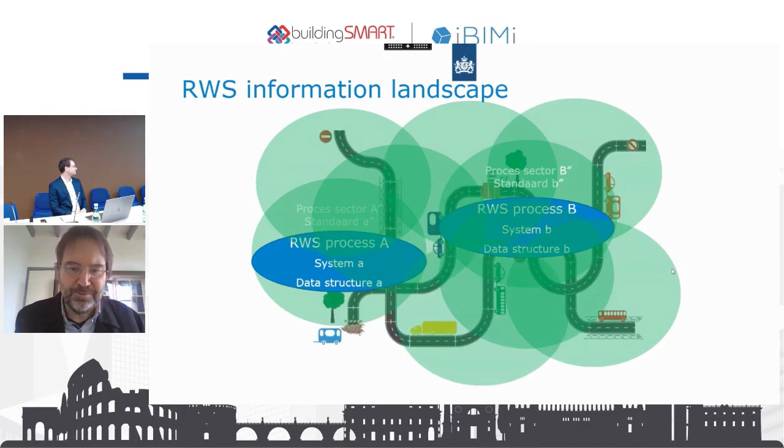We've done that with all our different processes. And because there are many processes running at the same time for many sorts of infrastructure, we end up dealing with a lot of different data structures, because we never developed our data from a data perspective. That's why people can look at the same thing and see different things in practice, even though the actual reality is the same. And this is not easily changed, because all these procedures and standards, they exist.

Now at Rijkswaterstaat, we have to deal with all these standards. And the challenge is, how do you do that? As Rijkswaterstaat, we have our information landscape, and that already contains many different systems with many different semantics. And we have to deal with the product landscape.

The product landscape increasingly relies on BIM models. So we have to be able to deal with BIM models, and usually these BIM models are made based on a data architecture which comes from the contractor. But we also have to deal with all sorts of open data that are available from a national perspective and so on, like underground data and data from other asset managers. So the question is, how do you do that?

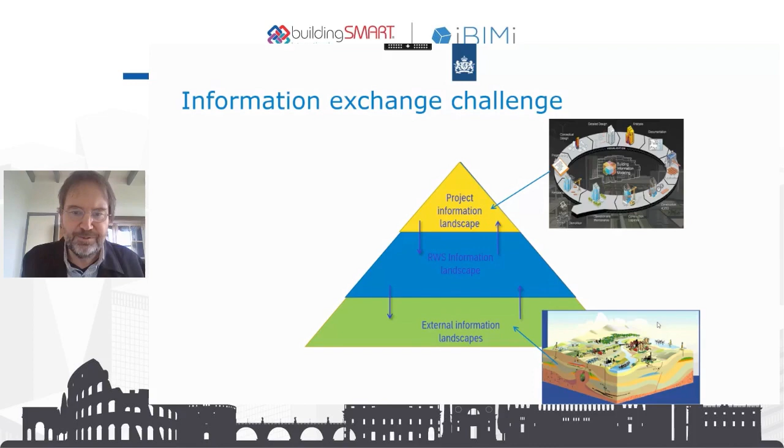The old-fashioned way is with our own system. First we try to make a big new system, of course, and we spend a lot of money, and then we say, okay, we cannot deal with this, so we have to learn to deal with a distributed world. And I want to share some of our findings, and also the relation with the BIM models.

First thing is dealing with semantics. We have a Dutch Rijkswaterstaat development of our own object type library. In our object type library, each concept has a definition. And we also made a mapping with the Dutch CBNL, which is the semantics that we agree to in the Netherlands.

Actually, it's going to be rebuilt because there are still lots of problems with it. And there's also a Dutch initiative, the CBNL. It has the same idea: we have all these dialects, and we want to connect them.

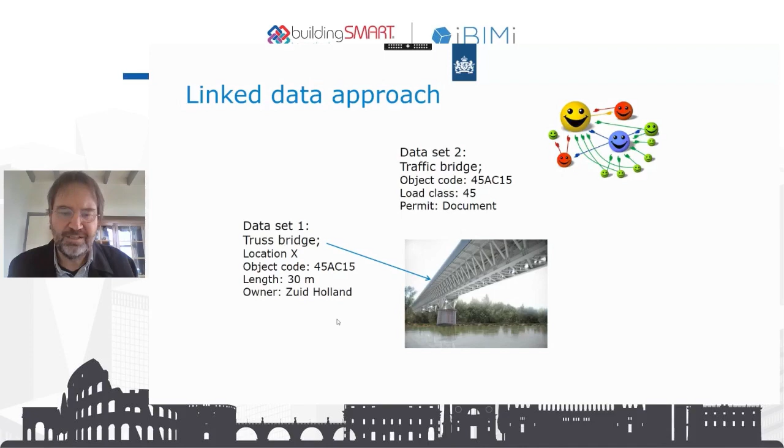And someone else says, I have a traffic bridge with the same object code, and it has a load class and a permit. Based on semantics, we can say a truss bridge and a traffic bridge are both subtypes of bridge. It has the same object code, so probably this bridge is the same one as that bridge.

And the third asset system may say no, it's a steel bridge on location X, and it also has the same subtype relation and the same location, so you may conclude this could be the same bridge. This one says it has a year of construction, 1900, and there's a document connected to it, maybe an owner, a person within the same region, so there's a relation because it's both owner. This way, using linked data, you could relate things without actually combining them.

And if you connect all these things to geospatial glue, then you can still find all this data from one point. So this is the thing we're looking at at Rijkswaterstaat. We haven't fully implemented everything, but there are more than 36 pilots running at Rijkswaterstaat with all different sorts of digital twin use, because each process sees a use for digital twins, and now we're looking at the way to integrate all these different initiatives.

So we want to use semantics because semantics gives the meaning, and we want to use location to connect all these data sets. Maybe if some new BIM model comes in, we want to be able to connect it, and connect it to external data, maybe scanning data or photography data, and find the human interface which makes it easy for us to find the data we're looking for, or to manipulate it the right way.

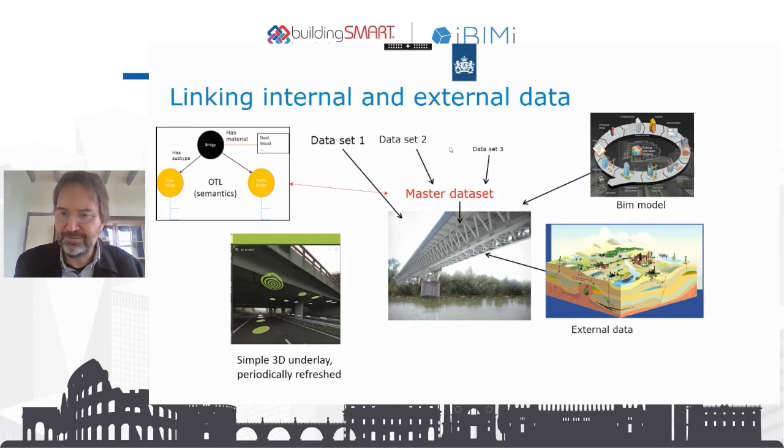And we don't do that starting with a BIM model, because we have a network which is 100% of our network, and we adjust maybe 1 or 1.5% per year. So you cannot say I have this BIM model and this is my model for life, because this BIM model has to feed into our existing asset management, because even if we have different projects, each contractor will give us a different BIM model, so none of it fits into our way of asset thinking.

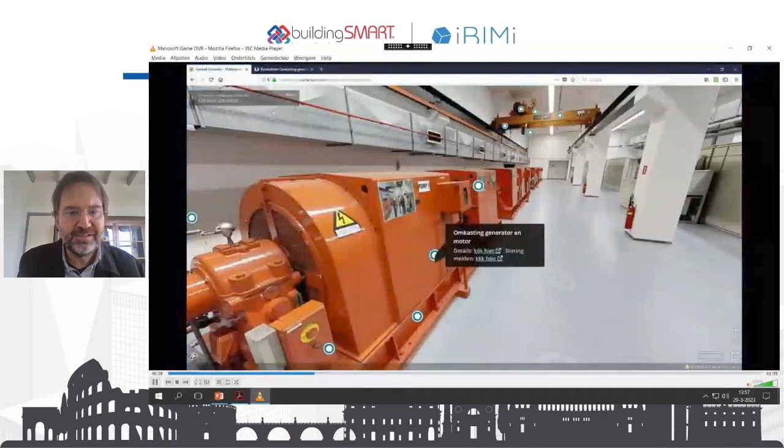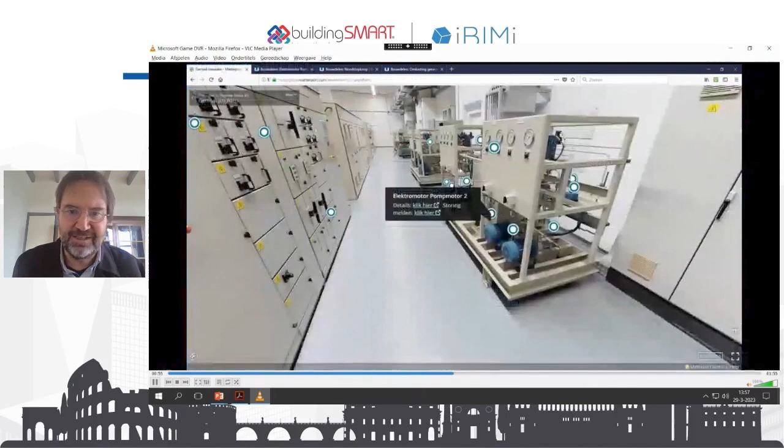The idea is that the one doing the maintenance goes directly to the right field in Ultimo to make a registration. This way, he makes sure he doesn't register it on the wrong machine, because he just goes to it. The other way is that he could also find other data related to this point. So it isn't a real BIM model, but it's good enough for asset management to go to the right spot and find other connected data related to it. This is a really practical way to deal with the problems we find in asset management.

I will now give you another example. This is about the Dutch dikes. We have dikes, and the underground is sometimes soft soil, and there may be some risks of dike failure at high waters. So they model the underground, and you want to do it in an interactive way.

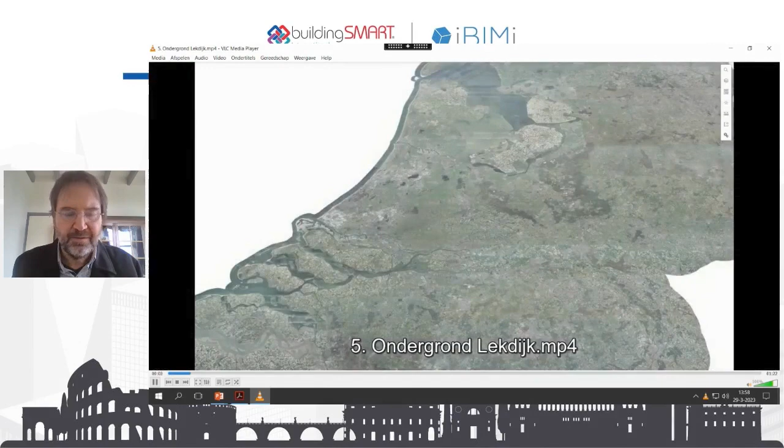This is also an open source viewer, Cesium. Here there are some maps showing certain types of details, and this can be placed on the underground. Here are all the measurements of soil composition, and based on that they made 3D layers. They made an interface showing how the underground looks based on the grid you put on top, or you could focus on one point.

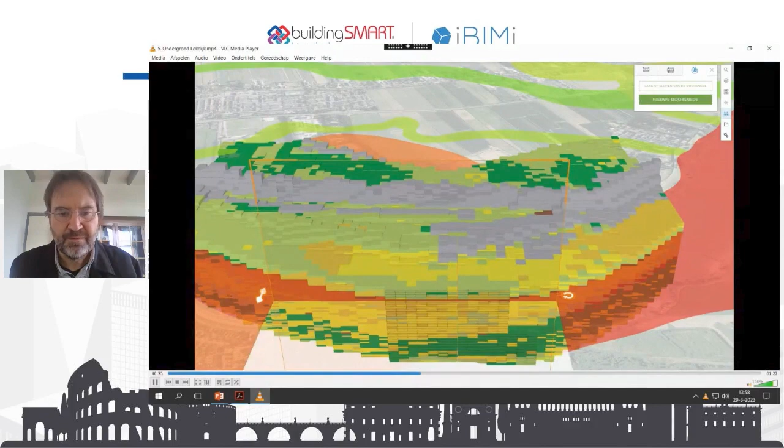And then you make an intersection and you can look how is the underground below this piece, the dike. The actual data used here is not owned by Rijkswaterstaat. It's open data, but we use linked data technology to connect all this data to a viewer where you can view it for the application we want to make.

Now there's a third one I want to show you, a digital twin pilot we did, where the idea is that if we have a shared environment, where in the past we used GIS, a flat 2D GIS, maybe we could have something where we could put all sorts of data on top to manage it in a more integral way.

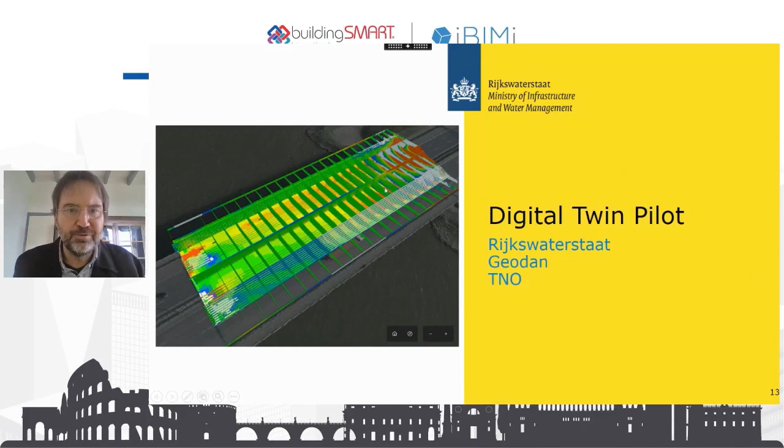Now I'm going to go to this viewer and show you some things. Our basic map is just a layer, a basic map. We could also have a picture made from the air, and we also have an open data source for all the buildings in the Netherlands. We can switch it on or off, so we put that on top.

It's not Rijkswaterstaat data, but it's open source available data. This sort of data has the energy label or year of construction. So this is all open data, and it's also an open source viewer. We could already have this data without doing anything ourselves.

There's also a tree library, and all the trees are in an open source data library, so we could also add them to our background. Then we have our own digital topographic data set, and it's 2.5D. Maybe I can show you about that.

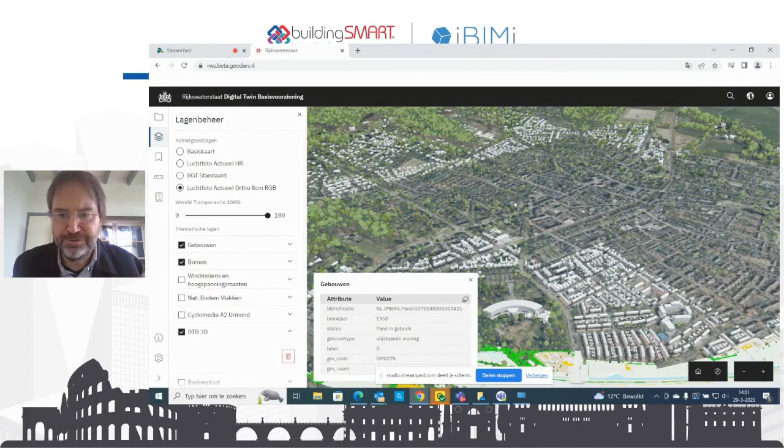Wait, I'll do it differently. I will go to the user stories now. You have some idea of the basic maps, and we made some user stories to show you what we can do with this. The user stories also have a description. It's all open available. So this is our basic map.

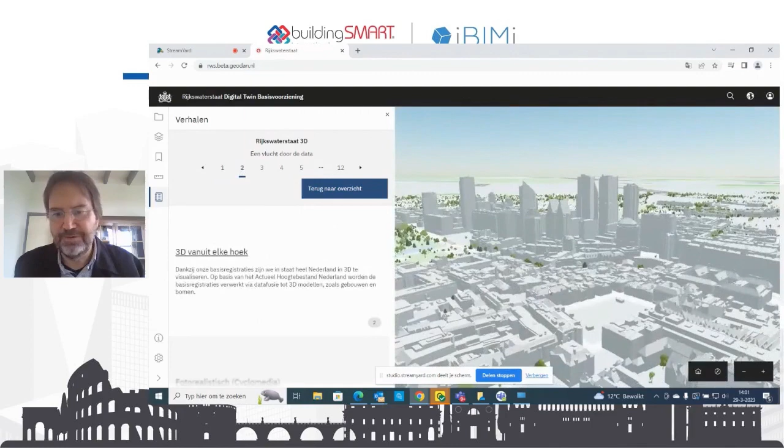This is Den Haag, for instance, but we have it for all of the Netherlands. We have data on all these buildings, available as open source, and we can put this in our open source software, so we could share it with each contractor without having problems with rights of access to this software.

We can add photogrammetry with it. This is an orthographic picture combined with laser scan view, giving a real 3D result. It's really 3D because you can access it from any direction. So this is all still using open data.

Then we add our digital topographic layer, so this is 2.5D. This is a traffic point where all these bridges are crossing each other, and they're only 2D at a certain height. But we have this for our whole network, so we also have it from our sluices and from our bridges.

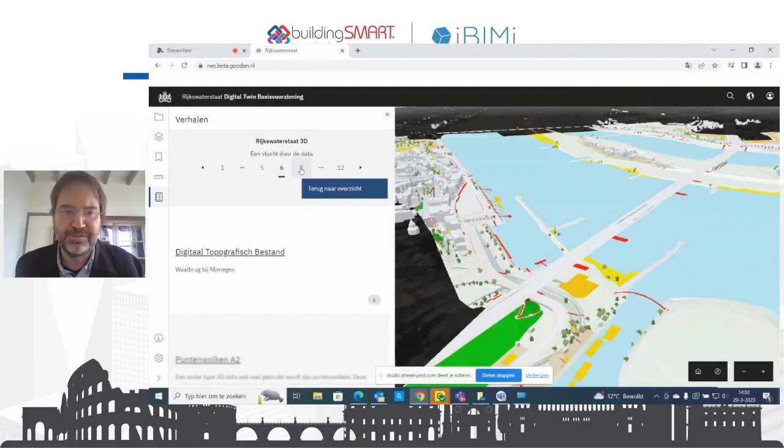If you have this basic layer, you can add all sorts of other data to it for specific uses. Here we have an example where we've added point clouds, which can be used to check our digital topographical layer, if it's correct. Here we see our digital representation, right on top of the actual real point cloud, so we can check if it's correct.

Another application is that we had a BIM model of the Heinenoord tunnel, a tunnel in the Netherlands. It built up a little bit slowly, but they didn't have a 3D model, and they wanted to put the maintenance on the market for a longer period of time. So they scanned it first, making a complete scan of the whole tunnel, and added all their existing documents to this.

First they made the scan, then they extracted 3D objects from the scan, making a BIM model from the scanning, and then connected all sorts of data to this BIM model. Now you can navigate it, click on one, and it gives you the data on this signal device, as we call it in Dutch. All sorts of data, sometimes drawings, sometimes installation schedules, and so on, were connected to this interface to communicate with the contractor.

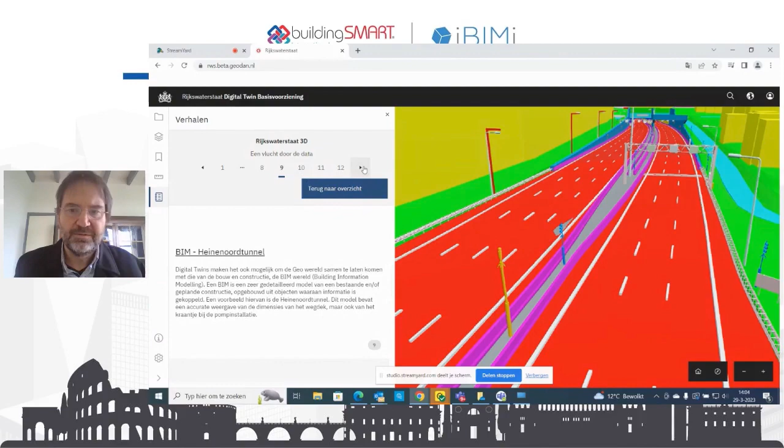Also inside, you can see the installation rooms, where this part was actually really modeled in a BIM model, because it was an adjustment they wanted to make. So you can add that to the surrounding you already have.

We also had a renovation of a bridge. I don't have my DTB below it, so it's now only a picture of the underground. It's not properly on the existing underground, but I could add an extra layer, and then it would work. So now it stands on top of the road. Of course, that's not correct, because one of the layers is switched off. But you do get the idea.

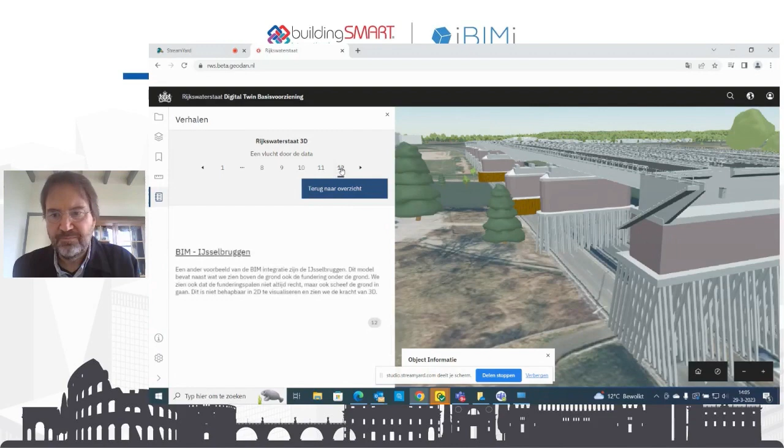And then also the part underground. So the last one I wanted to show you, the last story. Oh, that's a shame. I think it gets a little bit overheated. I will just show you the picture instead, since I can show it in my presentation.

The idea would be that there's a time slider showing where we expect the first cracks will occur. So this is a way where you have a complex model behind it, but the result is something simple you show in 3D. I could have shown you live, but it wouldn't work.

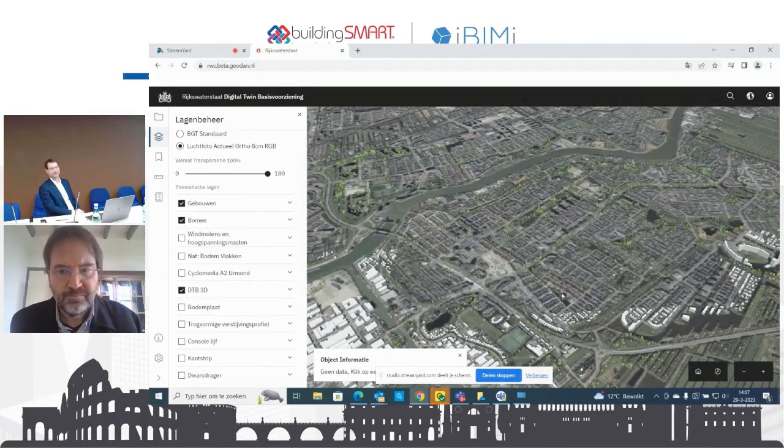So there's the buildings. Oh, here it is. So this is our DTB layer, our own data layer, where all our 3D data comes from our own management system. It builds up a little bit slowly now - I think I moved a bit too quickly, but I think you get the idea of what we are trying to show you.

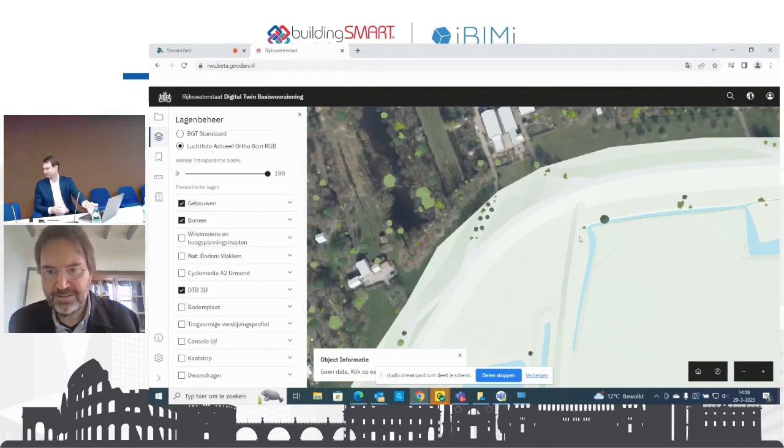I can also go to my own house, then you will see. It's a different one, it doesn't matter. You can go to any place and just see this is our DTB, and from our dikes. And here's the house which I aimed for.

So this is how nicely you can combine your own data with open source data from others and from government, and then make something which helps you in practice. I wanted to show you this because I think it helps the discussion about BIM and how BIM fits into asset management. And that's about the end of my presentation. Just in time, I think.

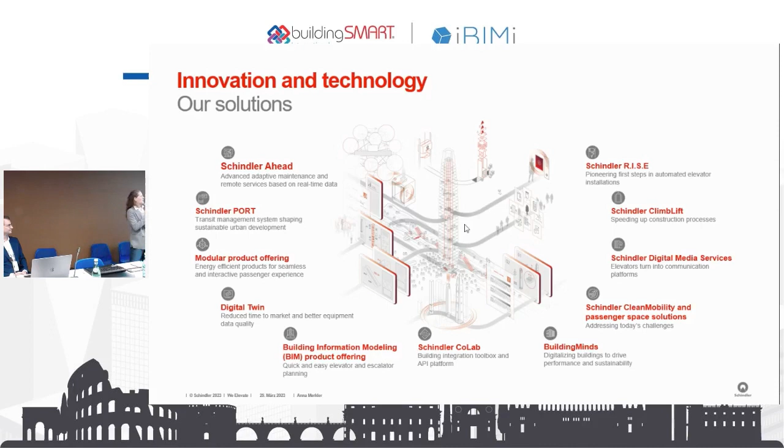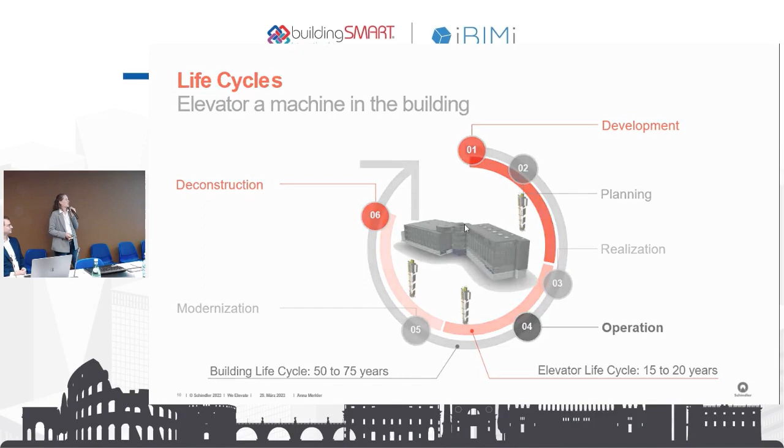When we talk about an elevator, it has a shorter life cycle, around 15 to 20 years. When we look at the life cycle topics, we have different life cycles inside one life cycle per building. Then, of course, in the Schindler process, it's not just the life cycle - we have new installation, then going into the operation or the service, existing installation, repairs, and afterwards modernization.

I worked a lot in modernization, doing research on how the building is looking in its current stage, and if the new traction machine will fit into the machine room or not. So modernization is also a big topic, and then, of course, we're doing existing installation again. In this process on Schindler's side, we have a lot of people involved - project techniques, installation, and of course the service side and the modernization side.

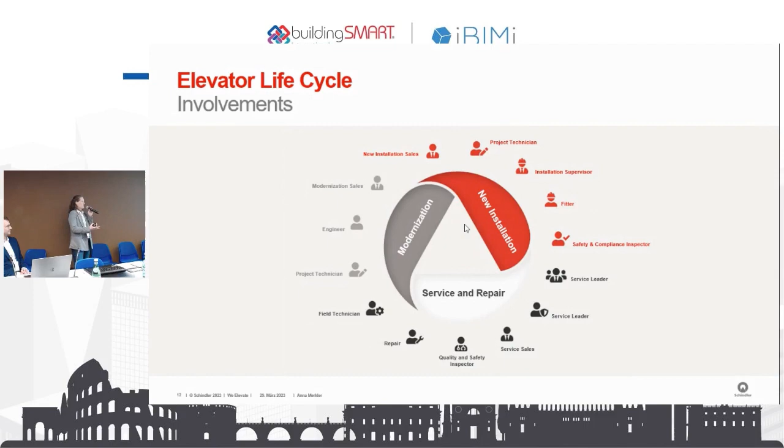That means we have, inside this life cycle of one building, a lot of challenges with interfaces - not just externally with our stakeholders, but also internally, in how we manage this whole data flow through the whole life cycle. And we've seen how different the market is - when we talk about buildings it's quite different than when we talk about airports, ships, or a hospital.

We have different requirements if we talk about different phases of the life cycle, and internally, different interfaces, different software and so on. So what are we doing to solve these challenges? I think we try to build a consistent data model from start to end, and it goes further and further.

Of course, that's quite complex and not easy to solve. We say start small, and we start with the planning phase, one step behind the other. Where we started, we came from the 2D world, drawing with ink on paper, and afterwards we moved to a CAD tool, still 2D, but now on a computer.

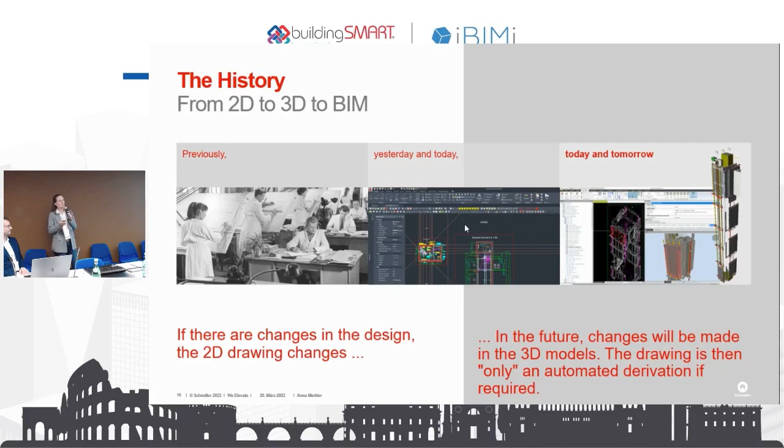What questions do we have to clarify for that? Within buildingSMART these questions were really common: who is involved? What do we need as input? What do we give as output? When do we need it? How do we need it? And why?

So we're able to define our requirements already in a quite early phase, for example for traffic analyses in a building. We've seen traffic is quite a topic on the streets, but it's also a topic inside buildings. When we get this data early from the customer or the building models, we're able to make specific traffic analyses, model-based, with already existing data. We don't need more than there is already.

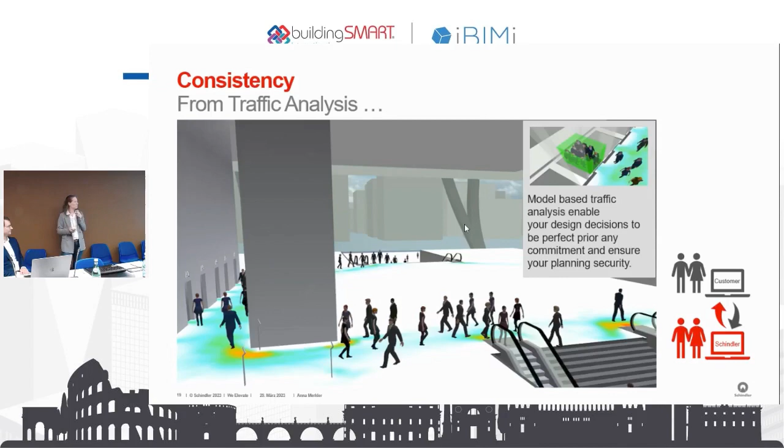What we then provide in an early step is a plan and design tool. It's web-based, and you need to insert around five values and you'll get a model back. Of course you also get a drawing and a product sheet PDF, but you already get a model in this early stage. We take a lot of assumptions in the background, predefined settings we've done, but it's already possible with five values to generate a BIM model you can use for your planning phase.

Here is what we do later when it moves in the direction of an offer. We get the model from the architect, and we've defined within the VDI that as a requirement, the request should be inserted in the model from the architect. So you already have an IFC transport element which carries all the requirements needed for us to define the elevator.

It's a little bit small, but everything is there. From our perspective we have quite good input, and it's already machine readable, so we can use it for generation.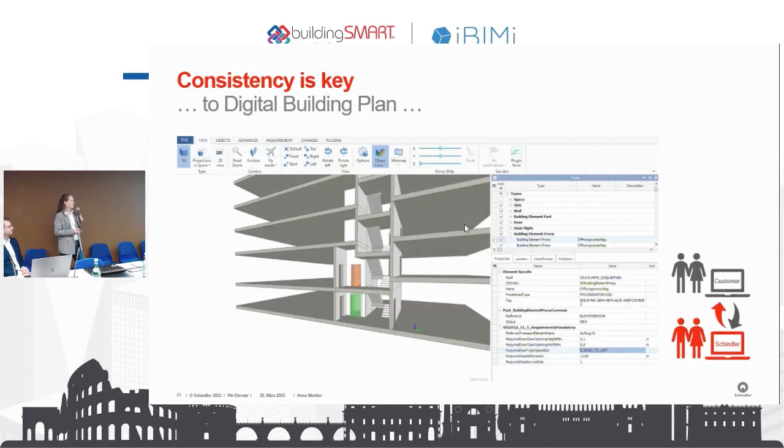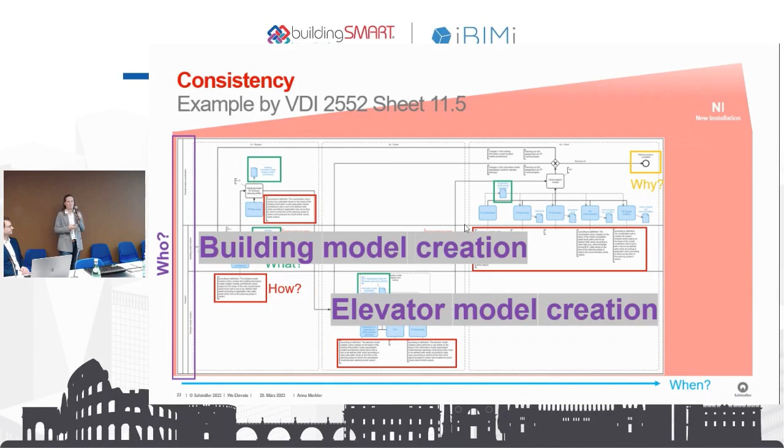So we have the building model creation, and what we do next is create the elevator model. With this data we got, here you see it now in a manual way, but that's done automatically. You get the input - for example, you see my first presetting about the doors was wrong, so I'll change the doors to fit the requirements from the customer.

What we are doing later - we now have the elevator model in an LOD 200 maybe, and you see we have the geometry, and also the openings are defined as openings so the architect can use them in his software again for his cutting and penetration planning - I don't know the English word, but for all the cuttings.

He also gets, for example, I think you've seen it in the beginning, this provision for void. So he already knows how much space he has to reserve for the elevator inside his building.

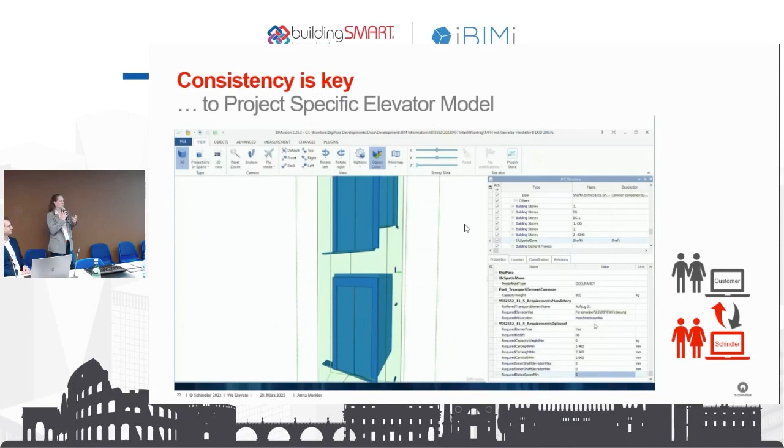And we matched it with phase A, where you get just the space you need, in LOD 200. Phase B, when you get a little bit more detailed, then you have maybe also the doors inside, and also some other cuttings you need. And in phase C, you have an LOD 300 where every component relevant for the life cycle, service and operation is pictured as 3D geometry, and of course carries also the necessary information.

So what have we done? We have seen a lot of challenges with the different customers and stakeholders. So we try to give quite easy access to this information, web-based, and this is not some data which is like in a library. It's really connected to our configurator, where you have all the time the up-to-date planning data.

We try to really make an early entry, as early as possible, because we figured out that there is a lot of information quite early available. So we don't wait, we want to do front loading. We all want to improve and get more efficient, and I think that's quite possible when we talk about elevators.

And of course, we don't talk about all of our information. We have a lot of information from the elevator, and I think we can crash all your products and softwares with our data. So we try to give a minimum output or input. And then, yeah, maybe there are 5 project-related specific elevator properties we need, but that's then not a problem.

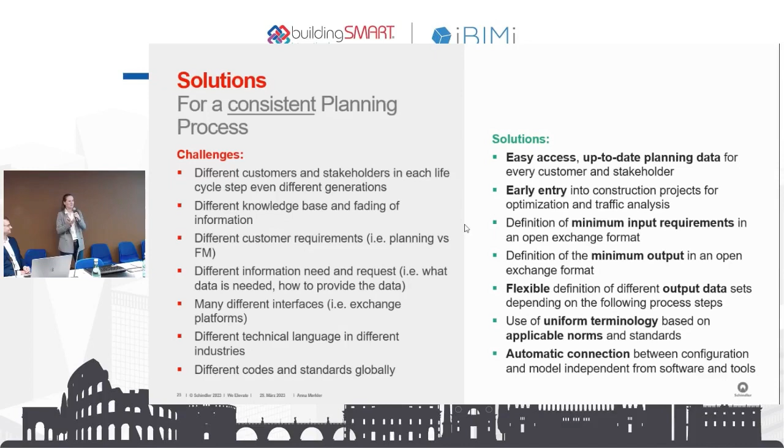And of course, we try also to automate these connections. I think we are not quite there yet, but we talk also about trying IFC JSON via APIs, so that you can then also do this exchange of information, input and output, what you have seen with the planning tool, in a quicker way - maybe not this manual typing from a printed sheet.

And then, of course, when we have this data, we can, for example, feed our robots for installation. I mean, they will never ask for a plan, they use the data out of the model, and then it's machine learning, and it works. And of course, that's our think small, start small, and we want to think big.

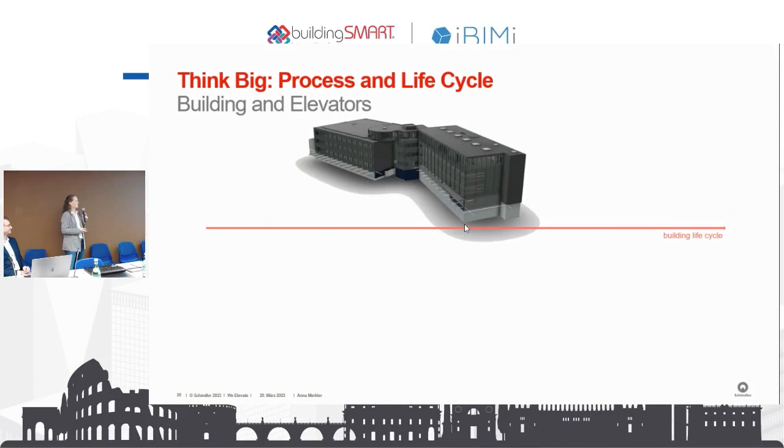Of course, we have not just the life cycle and a new installation in mind, we have the whole building life cycle in mind, and we start there with the traffic analysis, the planning and the fulfillment progress. And of course we then want to talk about the existing installation, about exchanging information in the operation. Therefore, we have a solution called CoLAB, which is then able to exchange data from the operating elevator with the building management system.

And of course, we want to get some information back for modernization. How does the building change in the life cycle? Are there any adaptations at the mechanical, at the doors, or maybe at the machine room? And then, we talk about the steps in each phase of the life cycle, at each phase of our process.

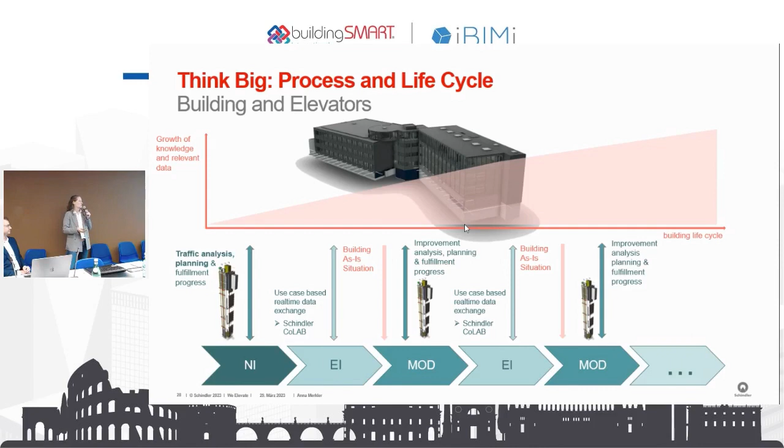So what have we done with this start small? We have project-specific data which can be exchanged. I think with the VDI, we already have a standard there which describes it for the planning phase of elevators. And where we want to go, we want to have automation and become more efficient in our planning, in our operation. And for that, I think we need a little bit more standards than just for the planning phase. And we need to set the standard.

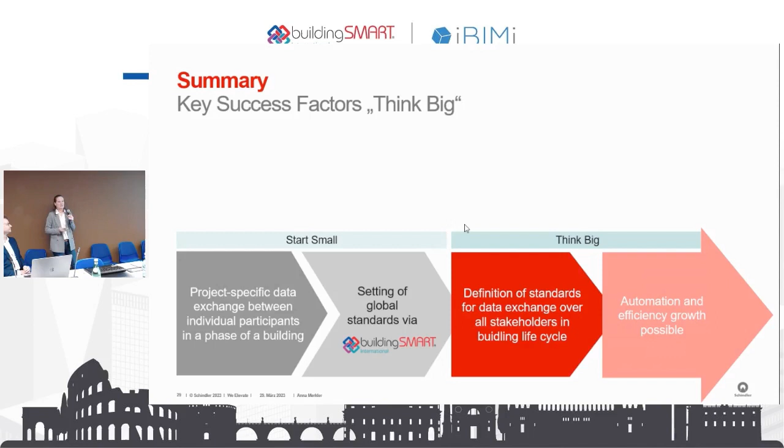In my point of view, we are buildingSMART, we are the IFC and CEN. And so therefore, we asked that this VDI is becoming, or going in the direction of, CEN.

We had there an exchange already with Rasso Steinmann, and we will also have an exchange with buildingSMART data dictionary, so we are going there some steps. The next step, to make it specific, would be to develop guidelines for construction and operation of an elevator, to do this definition also for escalators and moving walks, and of course to test this all in real projects. That's an invitation to contact us, Schindler or the buildingSMART product room, so we can go these next steps together. And of course, we are quite open to test the VDI standard we created already with software.

We tested it in real projects. We're using it already in real projects, quite good. And so I hope we can make it a little bit more specific and go in small steps ahead. For example, that every project in the future will have also an elevator model inside.

In the meantime, it seems that every stakeholder has a completely different approach, different things to solve. So there's another one. So... Wow, I don't know if it disappeared.

Okay, good afternoon everyone. I will try to give you our perspective as a manufacturer of the product, which is part of the build-ups or system, which will be totally probably different from my colleague. I don't know if it will be less complicated, much more complicated, but it will be different for sure.

So I chose a few topics which I think will give you some context why for us it's important to work in BIM. This is also my personal questioning: what should be a roadmap for the manufacturer in the context of BIM, how we as a community of buildingSMART International can provide some answers to make this transformation maybe much easier for companies like mine.

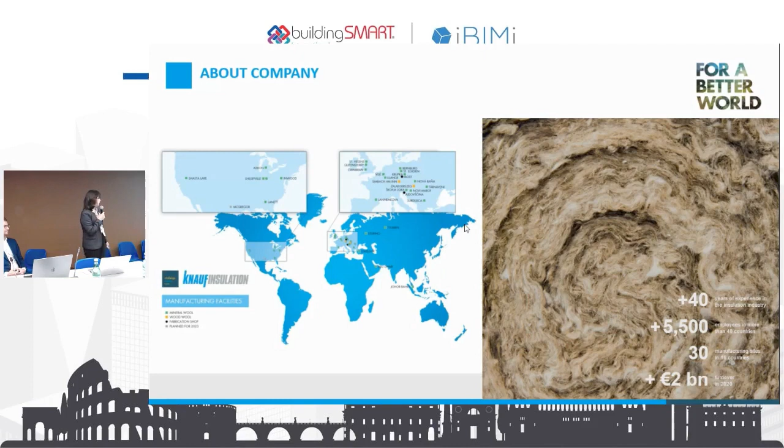Myself, Magda Pyszkowski, I'm a civil engineer. I did my studies in Poland, and I was working for many years for a construction company based in France - a big construction company. Then I moved to manufacturing 4 years ago.

I was happy to participate in the first meeting of the digital supply chain when we signed the memorandum of understanding with buildingSMART International. That was really a good experience. I'm also part of EURIMA.

EURIMA is the association for insulation manufacturers, and I had the pleasure with my colleagues to write a book about 5 years ago now, about data in the BIM environment.

Who is the owner? I think this is really an important question, as we discuss in each presentation, who owns the data. So we already try to understand this over time.

For the manufacturer, as us, as an insulation material producer, sustainability is really a key strategic focus today for everyone producing something used in buildings. This was always our driver as a company, but now I think it takes on much more importance because of circularity as well.

When we talk to architects, or read about architects, we need to take into consideration CO2 emissions. I think this is something driving us, and we consider this must be part of the design - this must be part of the BIM approach.

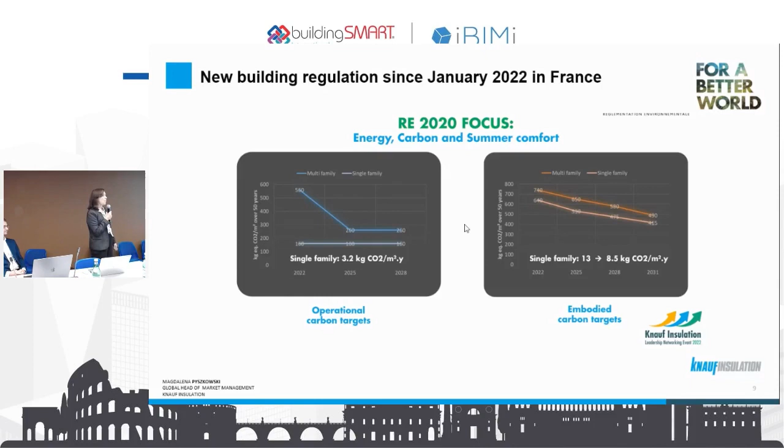What's the impact? It's in fact impacting all of the materials. So when we talk about insulation, insulation in the building element provides 3 to 8% of total embodied carbon. This kind of information is part of the build-up design, and we need to take this into consideration in the BIM design. So somehow this data must be reachable via BIM models.

I think this context is really important because it also gives you the connection between the data, or which kind of data you need, as a request for the data from the manufacturer. We are also trying to understand the landscape of BIM, building information modeling, depending on the countries, what is needed where, and we see that by country, the interest of BIM is different.

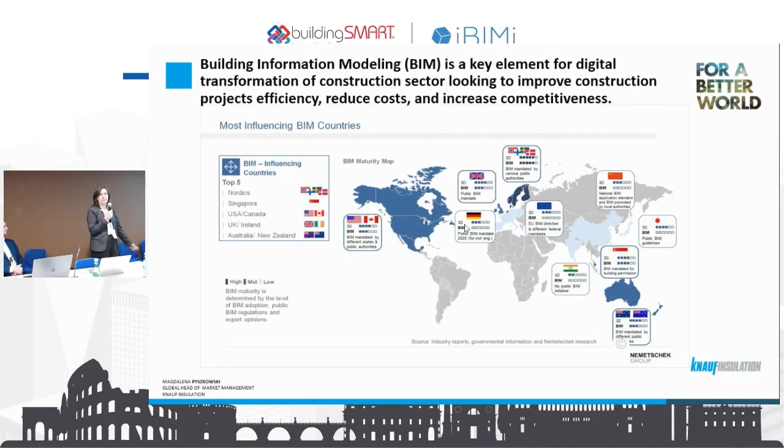So depending where you are producing, where you are selling, who is asking for what, it makes our job, working in the central part, quite difficult because you cannot just provide one standard for the company. You need to really deal with the different kinds of internal requirements.

What we see also in our world, specification, tender, quote, purchase, fulfillment, where we are as stakeholders, is that we are really switching from the analog to the digital world. These operations are demanded today to be done digitally, much more strongly than a few years ago. Now we have some kind of request already.

So, okay, we said sales growth maybe, because we can increase the company credibility. Maybe we can increase the product value if we provide the right information. We can maybe transform our transactions into partnerships. And for sure we can have direct contact and early presence if somebody asks, right?

So for us, in terms of cost reduction, I didn't find too much. Maybe we can increase the retention and loyalty of our customers, and maybe reduce cost per lead. When you sell something, you have leads, so you have the customers, and you need to pay to get these leads. So having easier access to our customers, maybe we can increase this part of the work.

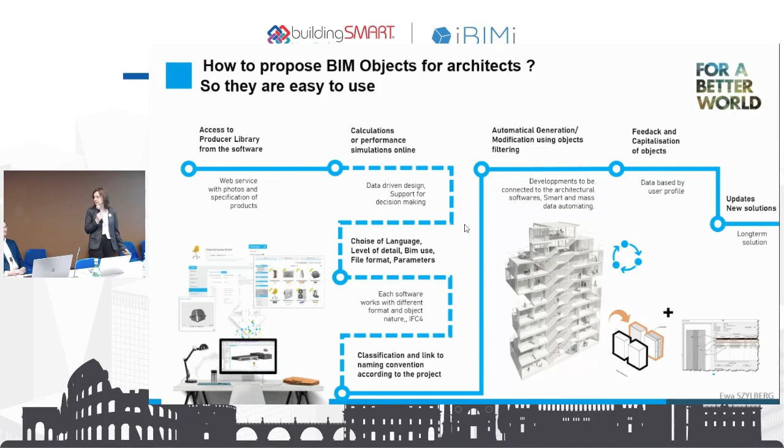The problem is that internally in the company, very often, we have budget for this, but nobody takes care of this. And we don't have a lead on this. So there is no bidirectional information.

When I joined, each country had a BIM object, different libraries depending on the country. So I said, let's do this a little smarter. Let's develop our own generator, and own our data, and generate the BIM object as it is. So we have a kind of solution generator for our objects on demand, which are not really useful for the models. But somehow, in the context of renovation, or circularity, or energy performance, that information can be used for calculation.

Especially in France now, after 2020. Then we have an internal solution called Planner Suite, which is really a help tool, a digital catalog of systems from Knauf Insulation and Knauf products. So you have both together, all of our production together. So we could provide, for example, a partition wall to your BIM model.

And then our Knauf Insulation development is BIM Factory. It's the collaborative library that we develop based on the certification of some systems with third-party manufacturers. And this seems to be a very customer-oriented solution today on the market.

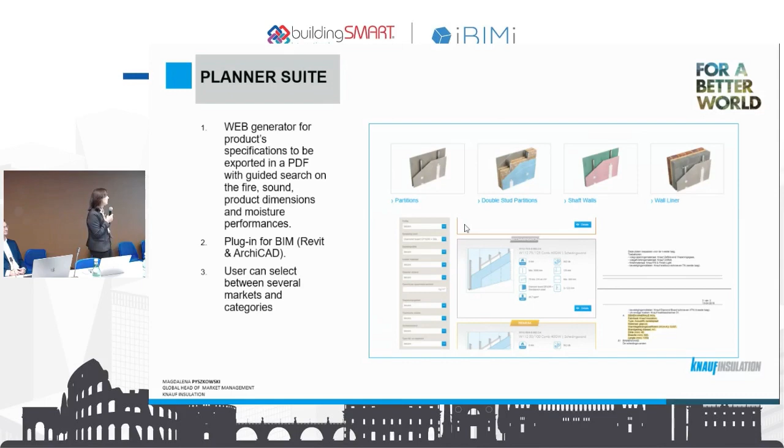This is our solution, BIM Factory, which is done on the website. You generate the model. In the beginning, we digitized the systems that we certify together with other manufacturers, so we have a lot of combinations.

Now we're talking about flat roofs. So with flat roofs, you see this is our product, and those are not our products. But as we have common certification and common requirements, we respond to this. So we have, not exactly a system, but together the certification that responds to the specific criteria of the building.

I think this is important because for us, this is how we optimize and put together our products to provide the system that fits the building's requirements. So we know how the building works, we know the requirements, so we certify our products together, and then we digitalize them.

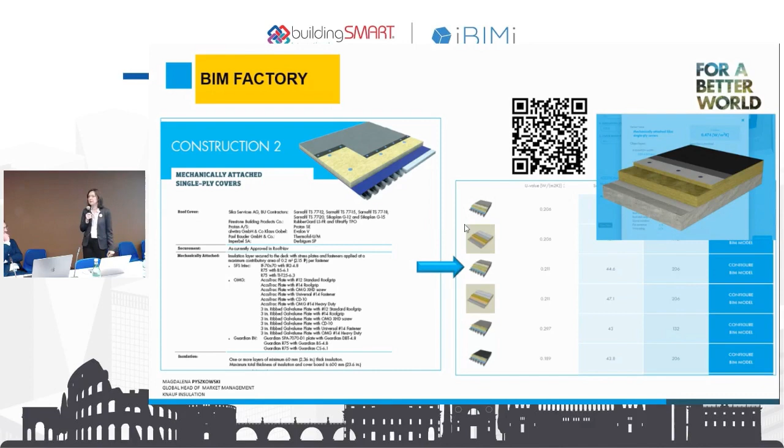So this is something you can go on the website and download, and still, as I'm saying, you don't need to know Revit. You download your system, you generate it, and you can have a nice 3D view, made for salespeople so they can go to the customer and show the system. Then you have the description of the system and three different types of outcome you can use. You just put your name, address, email, get this in your email, and then you can share it with those who need the system.

So for us, it was the easiest way how we can reach and be somehow present on the market also in the easy to use solution and easy to implement in my company. Because in my company, I don't have people who came with the Revit or other background, Archicad, for Eastern Europe, for example.

So we did this also for the pipes and ducts. We have one of the entities which is pipes and ducts, a technical solution. Also because we had the same problem that we cannot somehow provide the valuable information.

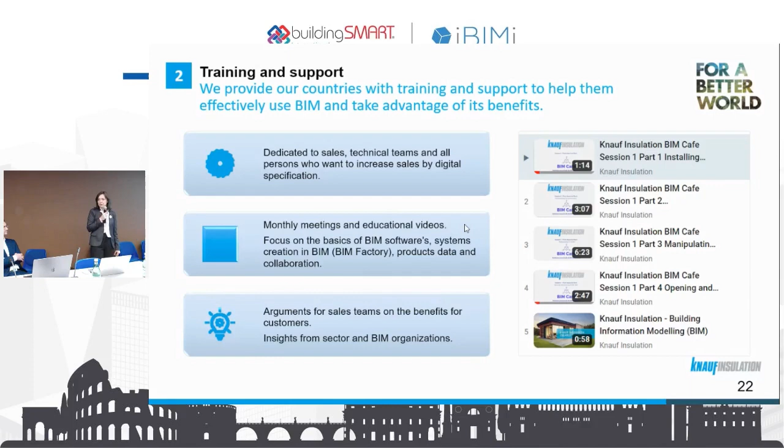Then I told you that this is a lot also about knowledge, upskilling of the people. So we do a lot internally, like a monthly meeting where we explain, we invite people to join our internal meeting to explain what we are doing, so they also understand what is the benefit for us as the manufacturer. We have also our YouTube channel explaining how our tools are working, available for everyone. This is the level I told you, customer-oriented solution, easy to use for everyone, so that we can really go to the market.

Just to tell you that we check this because I'm really a fan of checking. So let's do something, test, and then get the feedback from the market. We were present at BIM World Munich last year, and we presented our solution, and it was accepted. We got some feedback from people who came to the stand and tested the solution - we got like a 4.6 out of 5 as a score. Of course there is some stuff to be improved, but finally it was really a great experience and great development.

Then, because we are in the standard environment, we said okay, as I'm saying, I'm looking at what is the business value for me as a manufacturer, how I can bring the data in a standardized way. So is there anybody who can tell me which data they need for doing something?

Thanks to the work that we are doing internationally, we participated last year in a project about lean logistics. The idea is how we can use an innovative logistic model for construction based on the consolidation of the building product manufacturer flows and just-in-time principle.

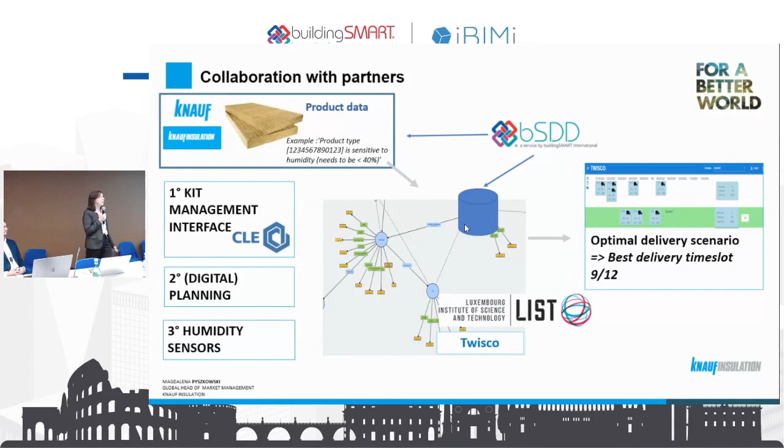We provide our product data in this free standard, and the idea was to have this optimal delivery scenario. So they have their own developed software for how to work on this logistics use case. This is a copy of our findings with this experience.

So as I said, there are three different solutions for the delivery of the data. This is part of our article that we provide to the global community, so please use the source and credit everyone listed.

In fact, what we found is that the GDSN, the GS1 solution, was quite easy for us. We had a kind of data template that we filled with our data. We didn't find the exact template for our product, but we adapted it to our needs. But we found that in some cases it might be a bit closed as a system, so if we want variants in terms of the information, it might be a bit closed.

First of all, thanks for having me, it's my first time. I'm Andrea Moscardi, I work from TIEMME, TIEMME is part of the Gnutti group. You found it? No, I'm trying to find it right now. Okay, perfect, here we are. I'm running a bit behind in the first part. I'm Andrea Moscardi.

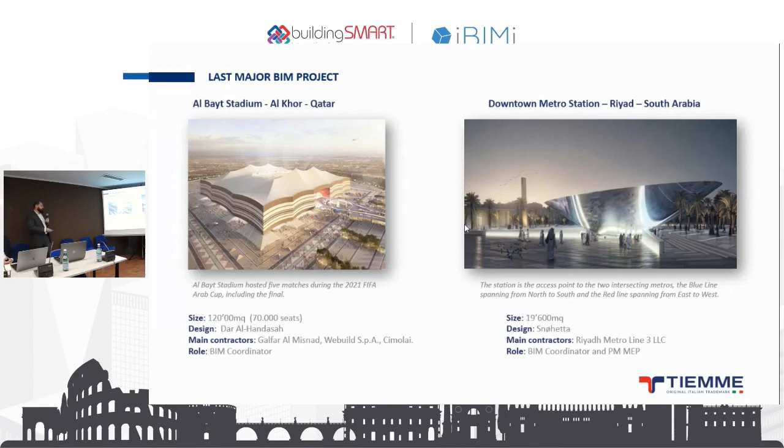This was the last big project I followed. I graduated with a thesis about BIM and facility management, developed with Lendlease and professor Ezio Orlati.

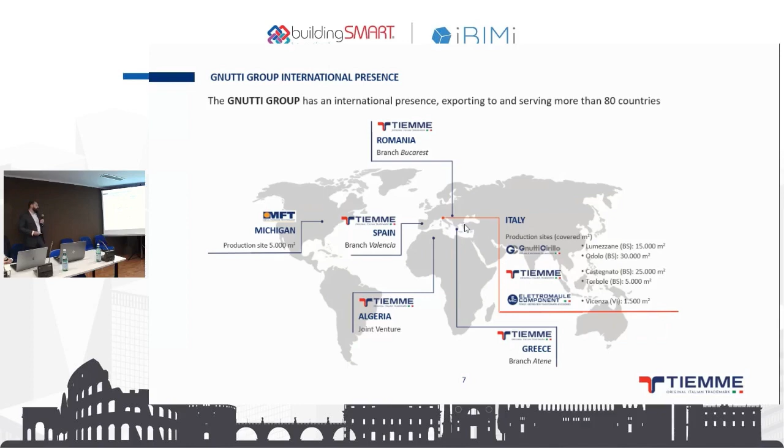What is Gnutti Group? Gnutti Group is a brand. Inside this brand, we have TIEMME Raccorderia, Gnutti Cirillo, MFT and Elettromaule Component, and we work in 83 countries in the world. We have headquarters in Italy, and also in Spain, Romania, Algeria, Greece, and a small production in America.

We have over 120 certificates about our product, because we work a lot in all parts of the world. And we have some synergy here in Italy with Curad, Casa Clima, and Kiwa for the certification.

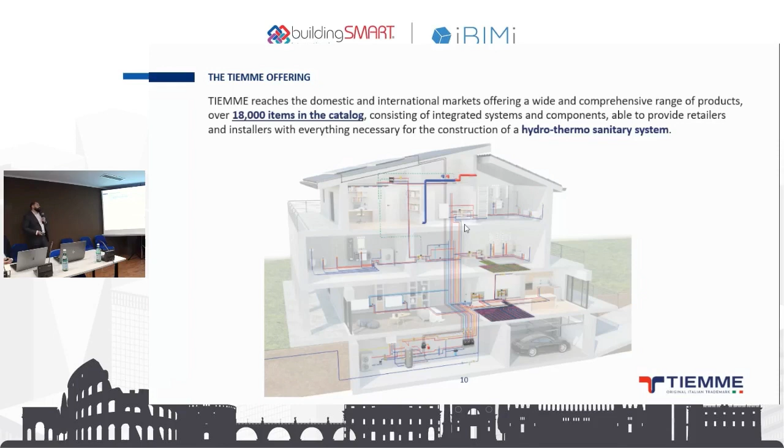We have a big catalog about 18,000 items, and we work in the hydro-thermo sanitary system.

What about our BIM product? We started in 2017 when we tried to collect what BIM is and why we have to develop items in BIM.

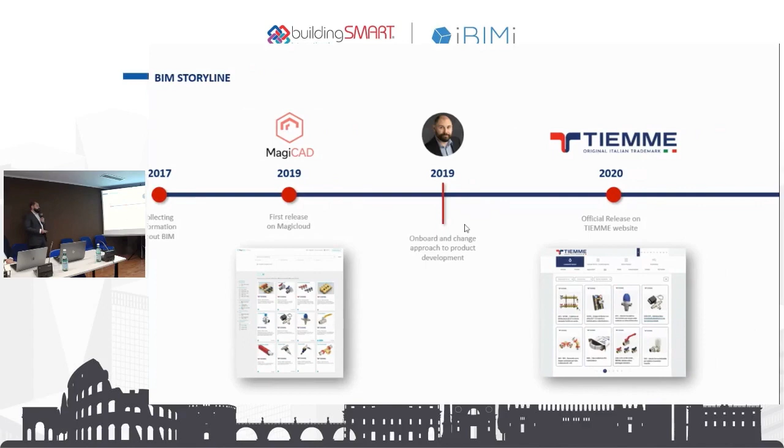The company developed some items with MagiCAD, which was the first. When I came on board with the company, we changed everything and released our product on our web pages and on BIM object.

We reached our first target at the end of 2022, with over 1,100 single item downloads.

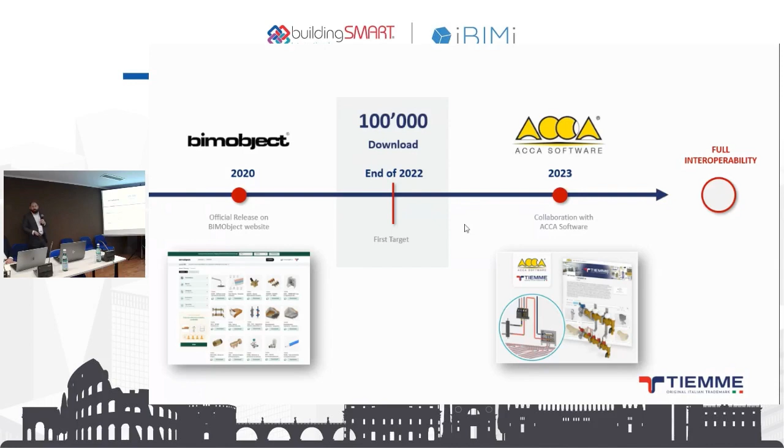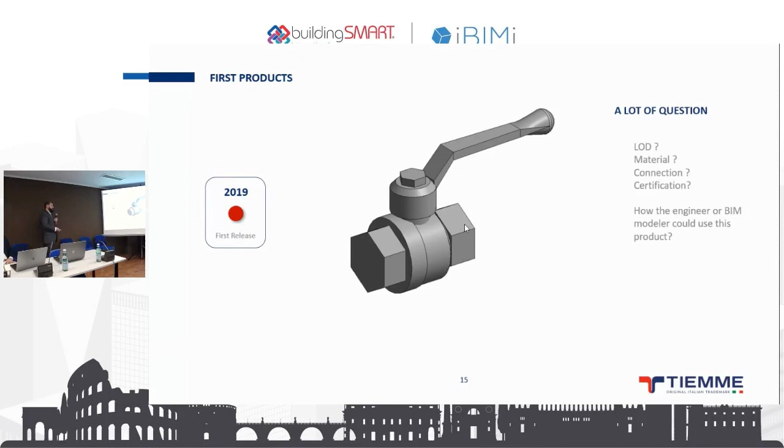And why did they increase? What do designers choose in our product? The first object was so easy - which level of detail, which material, connector, certification, how the engineer or designer could use it, and why they have to use this item. They need all this information.

It's a lot of information. What helped me with this information? To be honest, nothing. And when you have to select one object, how do you want to choose it?

What is this - 2310045? The user doesn't have to know all my catalog. I have to know what they need to get to the right item number.

When we develop our product, we think about how the user will use it and why they have to put my item inside the project.

We changed all the naming and created a work-breakdown structure. So easy - first part, in which category we work: architectural, structural, or plumbing.

The category of item - this is a valve ball item. The article, to understand what it's really used for.

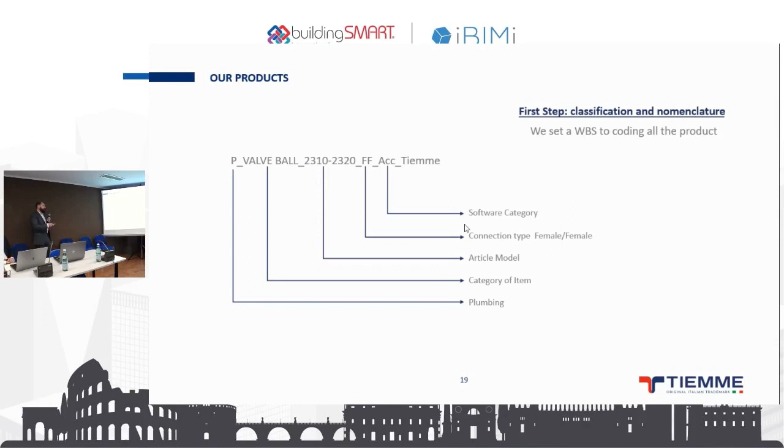The connection, female or male, in which part of the category of software you can find the item, and of course the brand name.

After that, when the designer chooses my item, the first thing they need is the diameter of connection. How big is this valve?

And we recreated all the parameters inside the object: for the text part, the description, the material and finishes, the plumbing information, all the dimensions, the mechanical information, identity, and of course the IFC parameter.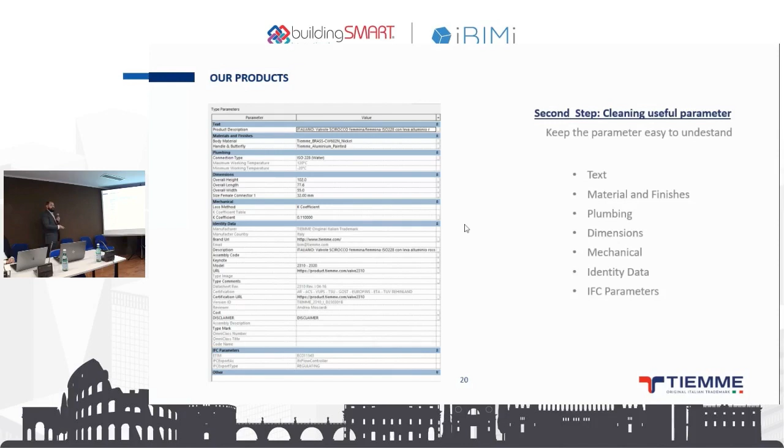Another part is creating 3 different types of visualization about the product. High detail with the material and correct dimension. The medium detail, for example, for the maximum space they need.

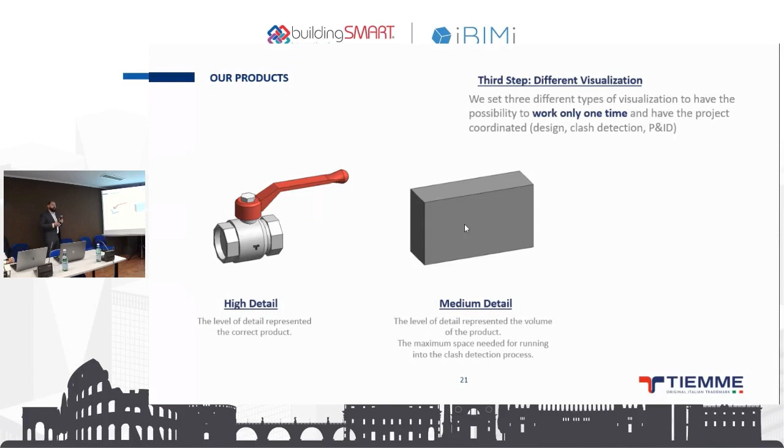If I have to run clash detection, I don't need high detail. I need the space that it occupies.

And inside, the low detail with the symbol. Because if I have to create a P&ID diagram, I don't need high detail. I need my symbol.

Inside the object, we create different selections for what I have to do. For example, for this valve, the lever is a geometrical part - I don't have to change the item.

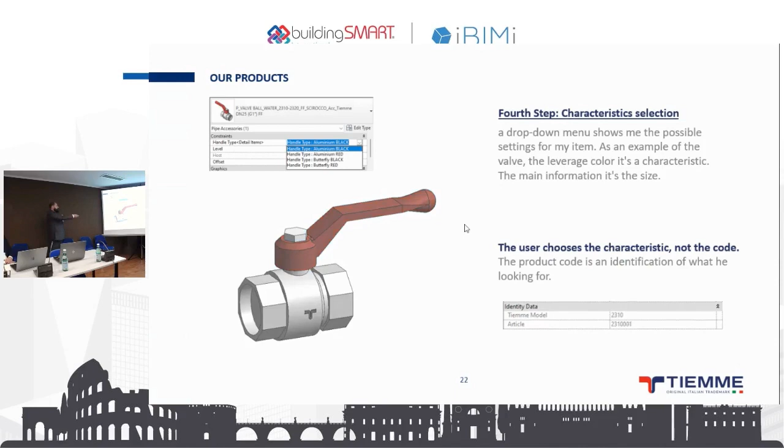When I choose the dimension and connect my pipe with my valve, changing the color gives me the code. We changed the process to choose an item not from the code, but from the necessity. When I change it again, that changes the code.

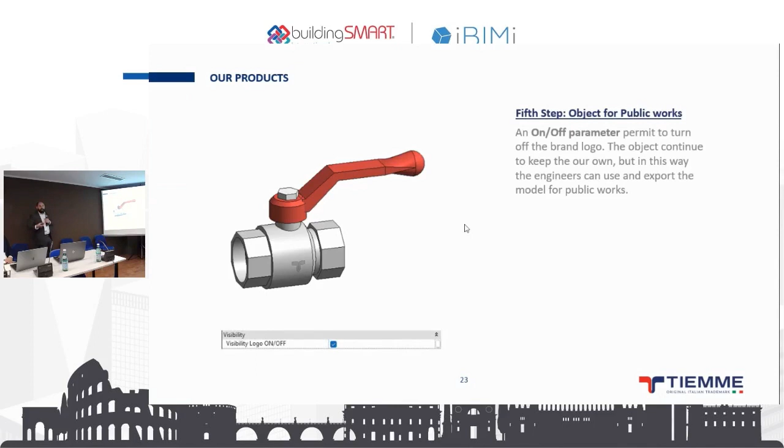And if you work for the public sector in Italy, you cannot place the logo. But for the brand, it's so important to place their logo, because other people could take and share or grab my item. For this reason, we set a visibility option.

Then, the most important part - when I place one item inside my project, how does that increase the total megabytes, the total size of my project.

With our item, you can place one valve that creates over 53 types, and the weight inside my project is so light - less than 1 megabyte.

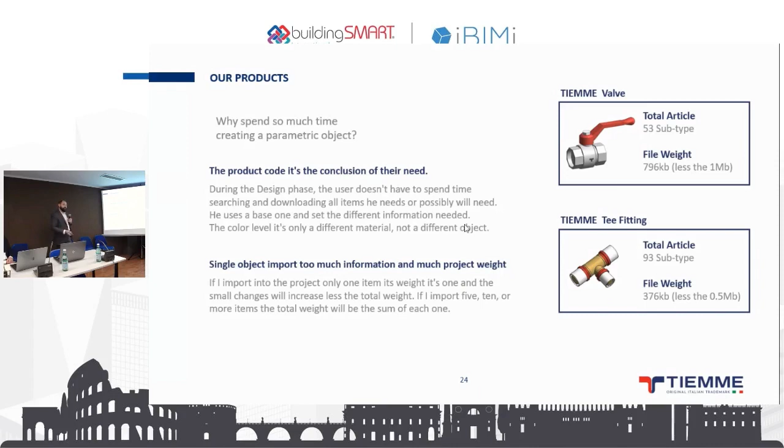It's different when I place 1, 4, 10, or 100 items inside - that increases the project weight a lot.

When you create a new project, this is the flat parameter inside the project. And when you import a new generic object, this parameter increases a lot. Into a project, we don't have only this, but we need, for example, something from EIR request, or from the BEP, or from creating some filter on schedule. And all these parameters are really needed.

In gray, we have the software parameter. In green, the primary parameter - for example, the model and article, to understand which product it is, IFC export as and IFC export type, to translate from a native software to open software. And as we talked, the visibility logo for the public administration.

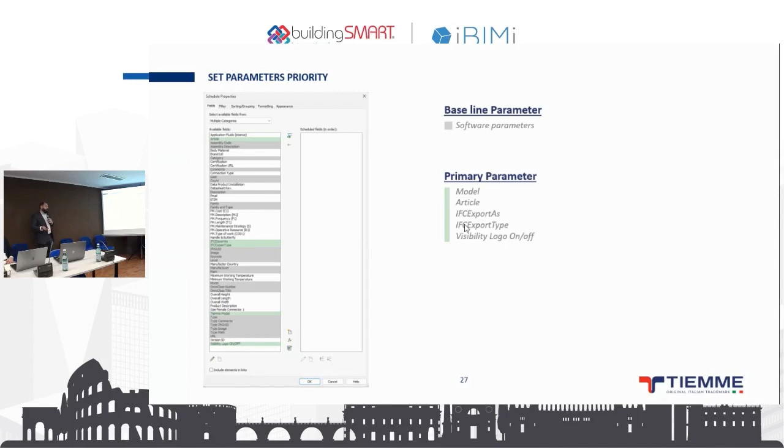The secondary parameter can be, for example, material or item for classification, the size, the product description, the connection, the certification, all the data sheets and connection to my certification program. And for example, email, brand, link, version ID is really necessary, or I can clean and keep my item light.

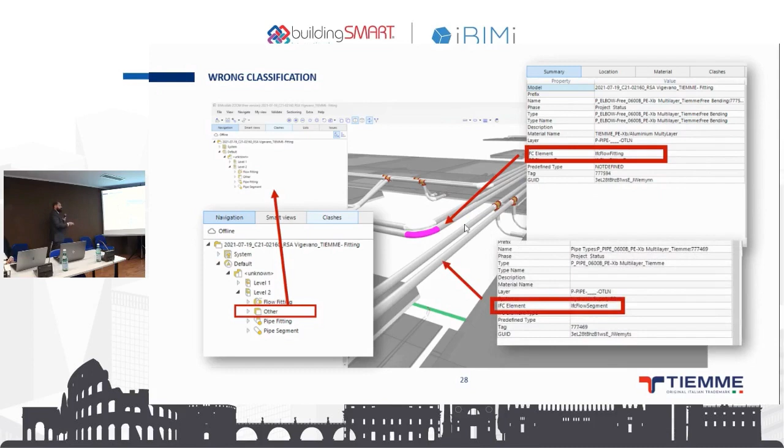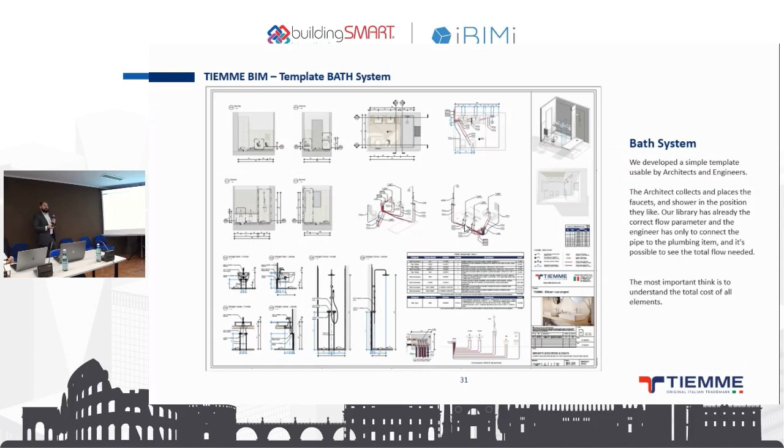We created a template to share with the architect, and what happened? When they create this type of model, they can collect and connect, and the faucet and shower give me the information to the pipe, arrive at the manifold, and collect the total flow.

But if you compare and try to create the same model in two different ways - with the manifold and with a single valve - with the correct information, I can estimate the total cost. The model is so easy, but changing the type and quantity of pipe, the cost increases, it's a double price.

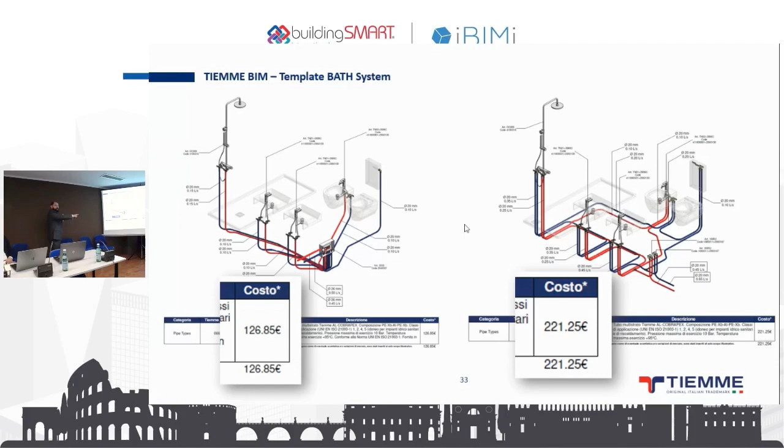And you can collect what? The model, the architectural data, all the quantity, the correct description, and the total cost.

The manufacturing in the future will have a very important role. This role will be the bridge between designer and constructor, because the designer doesn't have to spend so much time to create something.

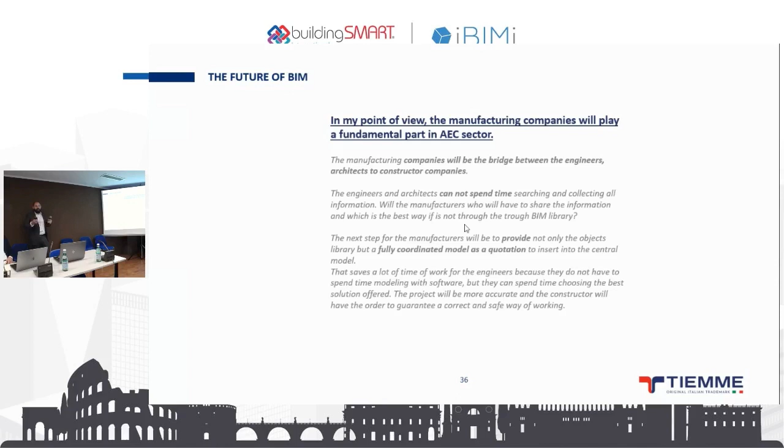In the future, the manufacturer will share the total model as a quotation. If you choose my brand, I set the model, or maybe you can choose another brand, but the designer doesn't have to spend time, because it's the problem for them. Why choose this? I draw in AutoCAD, it's the same for me - one line, I can change the size. I have done my work.

And what we do when we create a collaboration: we share all the pipe, all the box, all the manifold, and the architect or engineer can place it inside their model so easily. It's already coordinated. This is another example where in this school we share all the pipe and they place it into their file.

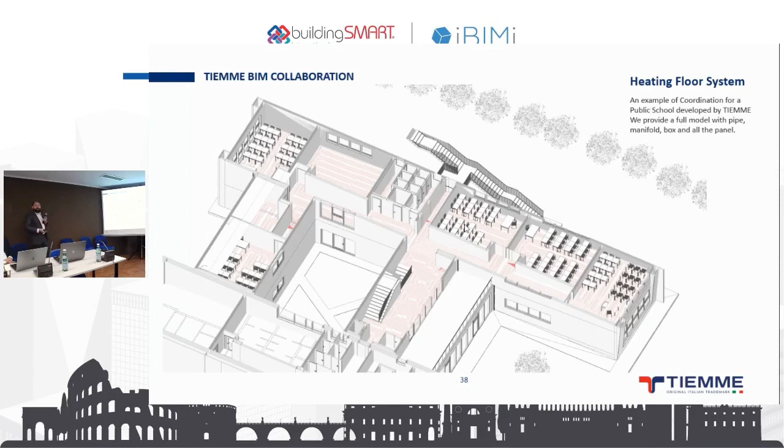This is another example about the floor heating system. We share all the model and the engineer places it in their work. The detail is so high, we can choose the level of detail we want to share with them.

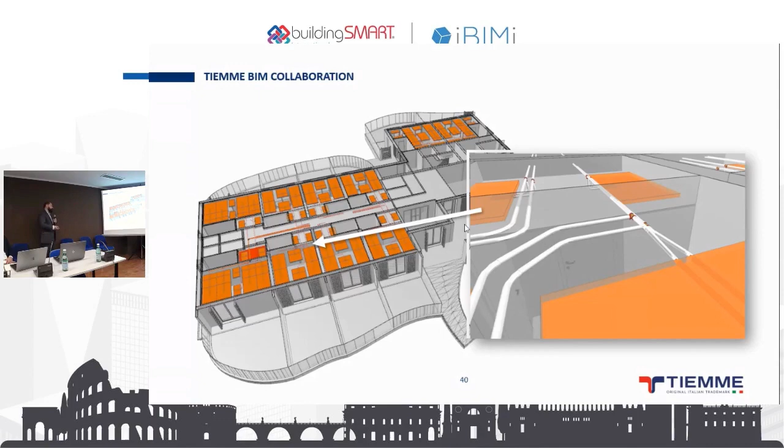This is another example where we offer all the item and the engineer creates the room. If he can create that, you can construct that, because you can buy the item and you have the correct space to place them. This is another two types of room - he creates the 3D part and collects what they have to buy.

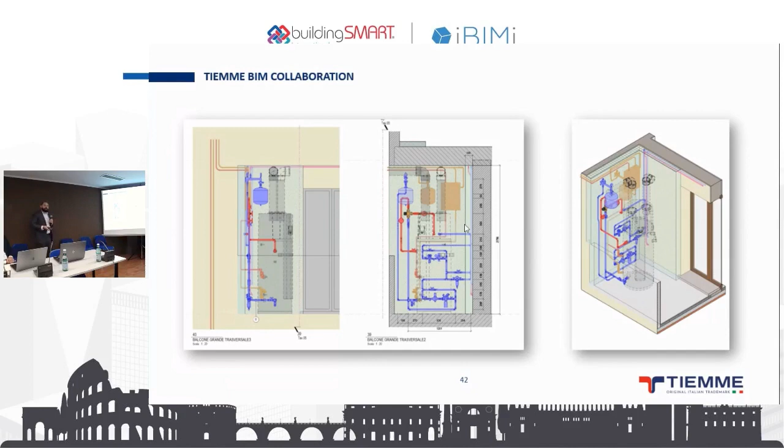We've seen four presentations, and each of them was completely different, so every stakeholder is looking from her or his own perspective. But what they have in common is that it's really important to see the product across its whole life cycle. So we have different stakeholders - we have architects who maybe don't care about insulation, but the purchasers do, but the architects should care about the elevators because it really interferes with their design, and so on. So I think we can discuss further with the presenters or with more stakeholders what we can do in the product realm to help them with the promotion of standards or with enhancing the standards, and so on.